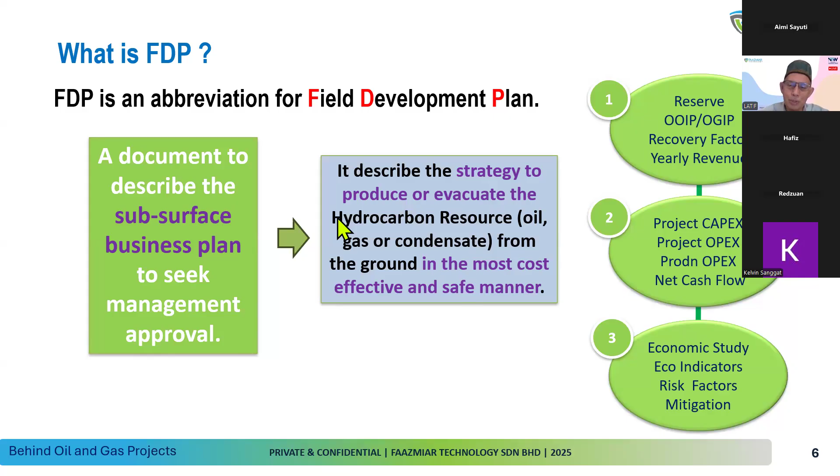So CAPEX means capital expenditure. OPEX means operating expenditure. There will also be another OPEX for production, and we're going to compute the net cash flow for the project and see whether it's positive or negative. At the same time, all this will be covered under the economic study and the economic indicators, the risk factors involved in the project, and the mitigation we should put in place to handle issues that come up within the field life of the project.

Okay, so for the field life cycle, you can see that we have five sections: acquisition, exploration, development, production, and abandonment. These phases cover the field life cycle. Normally we call it a conceptual FDP during acquisition and exploration. Then once we confirm it's a feasible project, we talk about the final FDP. We go to development, the production process, and the abandonment plan of the field before we leave the area.

So this whole cycle can go from 15 years to 50 years. Sometimes it goes beyond 50 years in some fields and areas. In terms of the PSC, normally a PSC will cover about 25 years. And of course we can ask for an extension of the FDP beyond the PSC to cover another 5 years or another 10 years based on government approval.

So first of all, acquisition of the area, like securing a block. There will be a bidding process. National oil companies like Petronas, the Thai authority, maybe the Vietnam oil company, or maybe an Indian oil company, and so on, will invite bids for blocks in their country.

And of course, a project is quite expensive, especially for deep water, HPHT areas or remote areas. Normally, we look for a partner so that we can share the risk of losing. So we distribute risk by having a partner rather than holding a 100% share. Normally, we split. This always happens in oil and gas because it's a high risk, high reward investment.

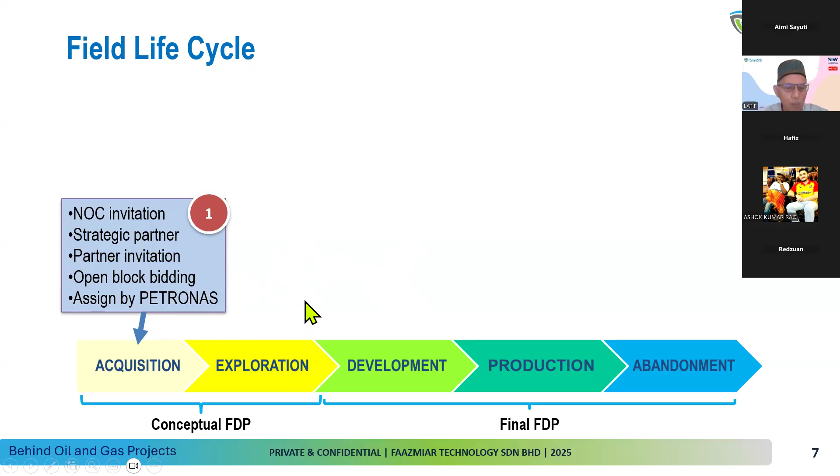For the second process, exploration, once you've acquired the block, you go for seismic acquisition, then you process the seismic. You have to decide on the trap or the hydrocarbon source from that information. Once you have some idea about the potential, you start to drill one exploration well, or wildcat well. This well goes through all the expectations, because before it was only mapping through seismic, but now you're punching through the formation, getting to the properties, getting to the fluid, whether it's oil, water, or gas.

You go as deep as possible. Normally, the exploration well goes to the basement of the area. Basement means that after that you're going to be hitting very hard formation, and it's difficult to drill.

This is the exploration well. Once you drill it, there's still uncertainty about the extension of the reservoir or field. So you might drill an appraisal well to confirm the extension of the field. At the same time you get more information from your logs, your core, and other drilling information — how fast you can drill, what issues you'll have drilling this well. All this is covered under the appraisal well.

In the appraisal well, you have logging and coring. You do production testing to know the potential of each reservoir. Then you establish the project economics before deciding whether to proceed with the development project.

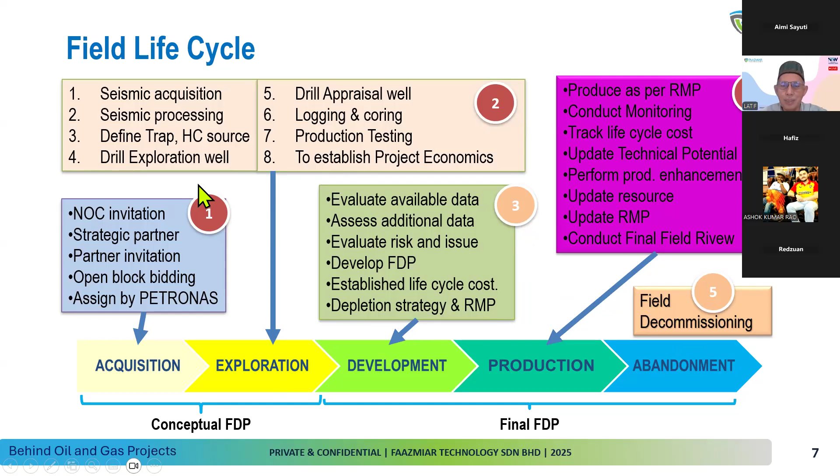So the next one is the FDP process. Quickly going through it: same thing, opportunity and acquisition, then we justify it through the FDP study, and at the same time we do the economics. If it's okay, we talk about going straight to initiate the FDP and continue. If it's not economic, normally it's not just given up right away.

So we have to go with another situation of understanding what can we do to make it economics. This is where we go and explore the technology available, and then of course we're going to assess the technology and go back to the study. And the study shows that if you improve your economics, then you go and proceed with your FDP.

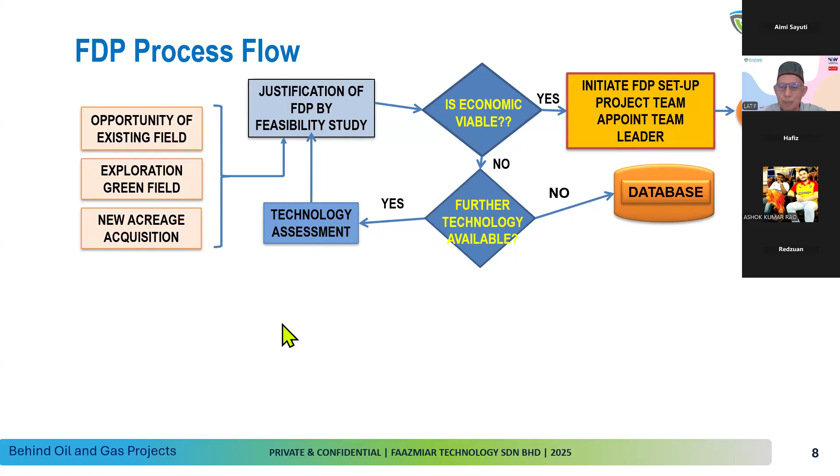So in terms of technology, there's a lot of thinking about how we should develop the field, with a different style, like a marginal field has a different technique to make it economic. If it's a big field, it'll be a challenge to reduce all the uncertainty of the reservoir. So when you've done that, and want to initiate the FDP setup, you're going to prepare a reservoir model, and then select the best option to develop the field, going back to what we discussed before in terms of technology.

Once you're done, you look at all these options. If it's economic, then it's acceptable, and you start to prepare for implementation of the project, get the budget, get whatever preparation the team needs for planning. And of course there's going to be a review of the final field development plan project. So that's more or less the cycle of the FDP process.

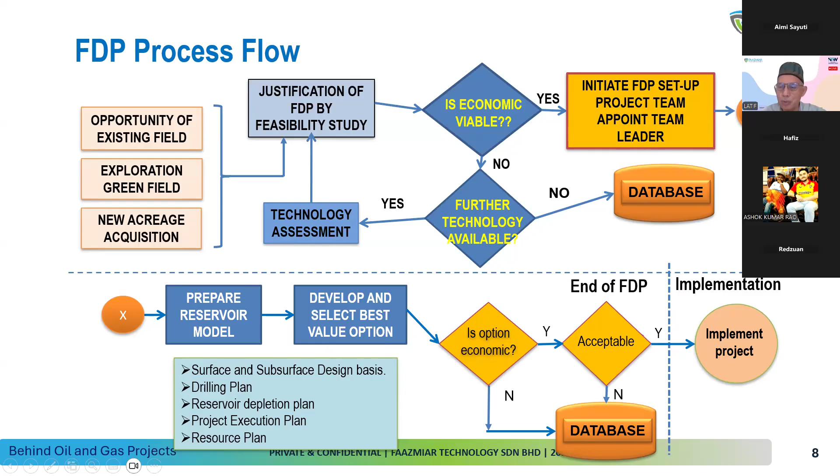Now, in terms of the people needed, FDP covers very few sectors, from exploration, to development, and then of course FDP and PNA and so on. So FDP is developed through multiple disciplines.

You can see that we have about five. But the team here should be doing the job to gather information, do the static modeling, dynamic modeling, and then select the development option and do the front end engineering to build the facilities, the platform, the pipeline, and so on. At this stage you sometimes have a subsurface manager who will more or less manage the project for these phases, and this is a transition. The project manager will also cover all the field development plus the construction of the facilities.

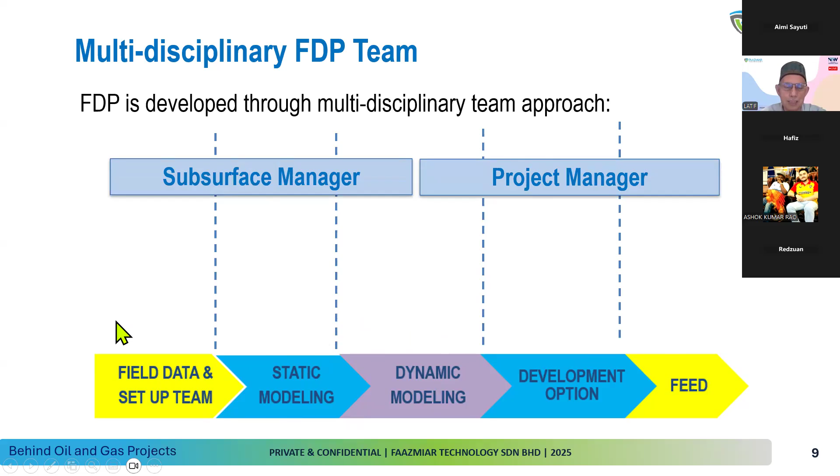So now we can see that for the people involved, normally the first phase involves geophysicists and geologists. Geophysics is going to be the seismic, geology is going to be the static modeling. And then petrophysics, we have to improve, because we have some data on the rocks. Petrophysics will evaluate the rock properties, at the same time the geomechanics, which will help us build up a good picture of how the field looks like.

And then production technology gets involved with the engineer. And then it comes to development, where we have facilities engineers and economists working together to really make sure that we complete the project successfully and it's ready for production.

Then for geophysical, this is the first start of the geophysical project. For the process itself, it's more or less the same as we discussed before: data availability, then we do the seismic well tie-in, interpret the seismic and mapping, and then do velocity modeling. Most of the mapping here is time based, so millisecond versus millisecond. But when we talk about converting those milliseconds to meters or feet, then we can see the thickness of the reservoir and how deep each reservoir is. So the conversion is important here.

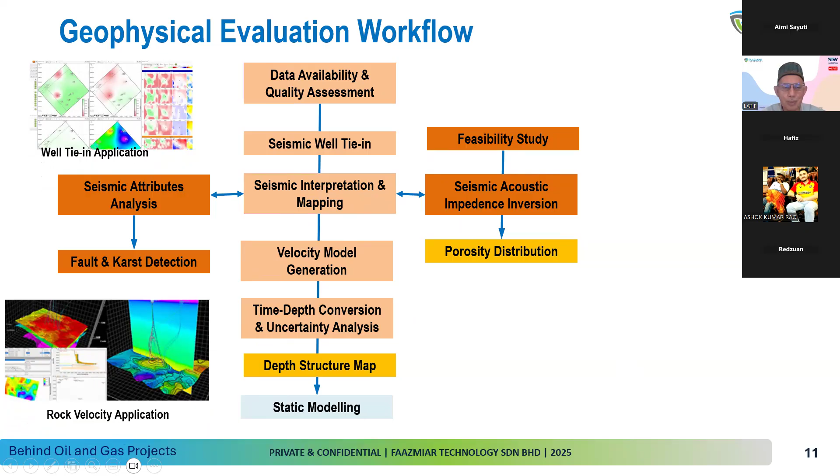So you can see all this, what we call the seismic data, how they compute and correlate from seismic and the well that's been drilled, the exploration well, with geomodeling software being used. And of course, all this calculation during the process of geophysics is going to be critical.

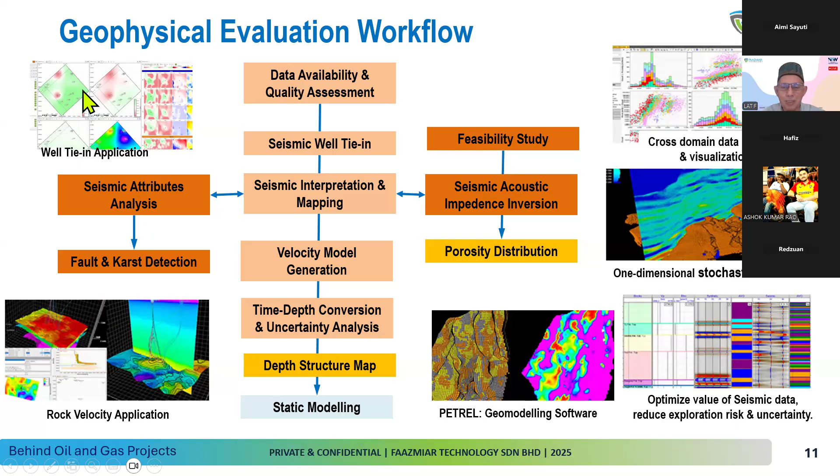Before, they couldn't imagine the extension of the reserve. But with seismic interpretation processing combined with the wells, they can more or less understand how big the reservoir will be.

Once they do that, they have a cross section of about 800 meters. This is the cross section, we can see the plan view, and this is one well - the exploration well - and this is the development well. So this helps them really understand the total field as a whole.

This is the seismic two-way time depth conversion, where from all these offset wells and the wells they've drilled, they can identify the conversion from two-way time in milliseconds to the TVD of the reservoir.

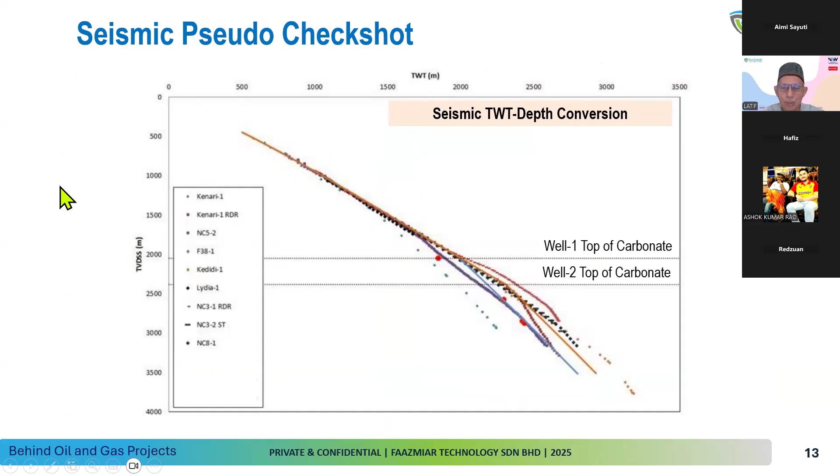So when they do the planning, they can see the depth and use depth rather than timing in the well tie. So this is the depth in meters, and this is the well drilled, which they correlate with the seismic.

So the well tie-in with seismic helps give an indication on how to interpret each layer. For example, the well we drill gives us the true result of formation types, porosity, permeability, hardness, and other elements - whether the rock is going to be solid, fragile, consolidated, or unconsolidated, and so on.

So they tie this into the seismic, and from that information, normally AI will be used to analyze how to correlate certain portions of the seismic with this tie-in. This improves the quality of the seismic interpretation by having the well tie-in.

If you only have one exploration well, the accuracy is going to be within a certain range. But once you have a second well, you have a quality check, and you get better results interpreting the seismic, because seismic gives you an overall field understanding. A well only covers a small area, but seismic helps you understand the total field coverage in terms of potential traps and any remaining hydrocarbon.

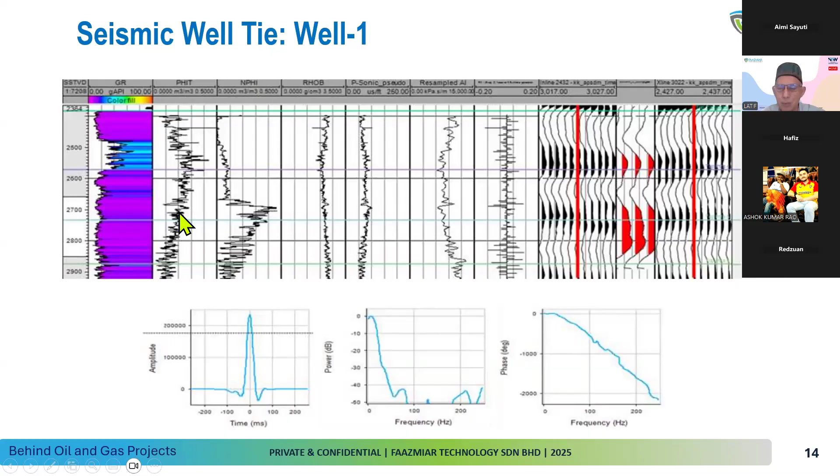For seismic interpretation, they start to identify the potential reservoir on each layer. Because our geophysicists have the expertise, when they tie in with the well, to see what layers they can identify from the exploration well versus the appraisal well. They can predict and put a virtual well at any point to interpret the intervals of reservoir on each one.

That's the beauty of having a well tie-in between seismic and the wells that they drill.

Once we have that - this is from west to east, and this is north to south, showing different cross sections - you can see it's like a cone or a dome shape, where each side is about the same size. Once you have that interpretation, you use it for your static modeling, and you can start to see all that in depth at the top of the carbonate or the layer and so on.

So this is how we interpret from the seismic to identify the top of the reservoir, and then how many reservoirs we have for that particular field.

Velocity modeling is another area where they use velocity to go through the potential reservoir and the potential thickness of the reservoir as well, because once you have the velocity, you have depth in meters rather than milliseconds or time. This helps identify the total gross bulk volume of the reservoir.

So the gross bulk volume means the total volume without considering what the clay content or the water content is going to be, just a volume. But of course, you're going to have to find another way to see where the level of water is, the height of the water, the oil, and of course the gas, if any.

So this is an example of how the seismic shows you in terms of the contour map. It's going to be like a contour map. So this is the top of the hill, and this is the end of the hill, so it's like a dome. You can see they have the exploration well, the appraisal well. So this is the same position as before.

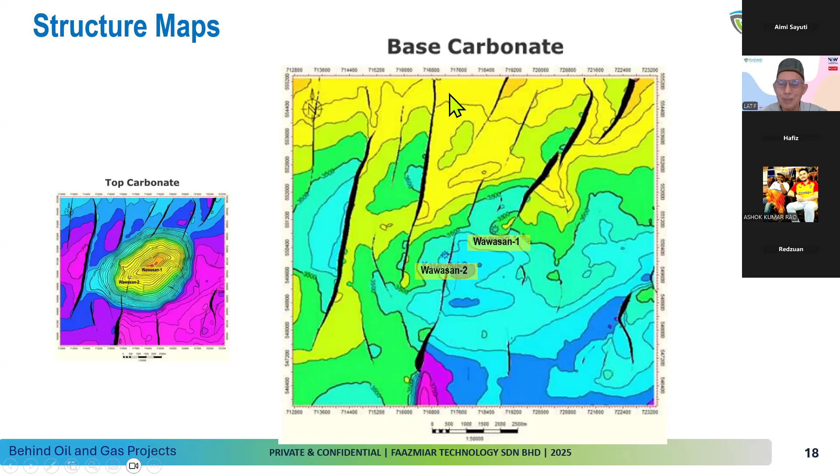So when you go to the base carbonate, the base of the carbonate is how it looks like. Normally for us it's quite difficult to understand these features, but our geophysicists and geologists are aware of this potential fault within the field, because some fault is isolating the hydrocarbon from one side to another, and some fault is not sealing, so you can see the hydrocarbon communicating from one side to another. So it's all been studied whether this fault is sealing or not.

So in terms of petrophysics, they're going to study the core as well as the logs and try to see the distribution of porosity percentage. They start to learn about the rock properties and the core depth. So with the core that they have, they extrapolate the core studies on each one, the porosity. So you can see the distribution is random.

That's why it's quite difficult to find an average of a certain porosity. So this is where we talk about whether it's a normal average, a weighted average, or a different type of average to consider all these differences. It's going to be quite difficult. That is where we call it uncertainty. Porosity can be very low and can be very high.

At the same time, we're also going to evaluate the formation pressure. Formation pressure gives us the strength of the reservoir to produce hydrocarbon naturally. For example, sometimes you have a good, strong water drive, so the oil can be produced for some time, about 10 years, with natural drive. Sometimes you have a gas drive, a gas cap that can push the oil up for at least the last 5 years without needing additional water injector or gas injector. So the pressure profile is important.

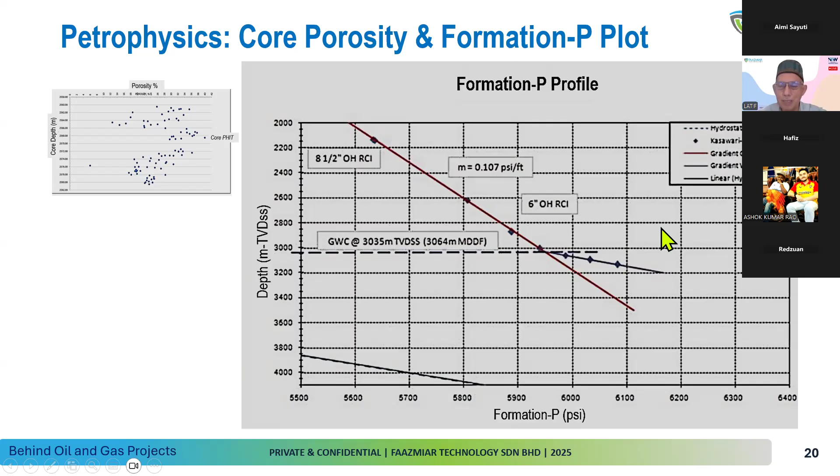Another important thing about the pressure profile is identifying the gas-water contact. In this case it's gas. So what happened here is this is the hydrocarbon, this is mostly what we call the hydrostatic of water, and then you see a deviation. The deviation is steep enough to show that it's in the gas zone. This is how they use this formation profile to identify whether it's gas or oil, by the gradient.

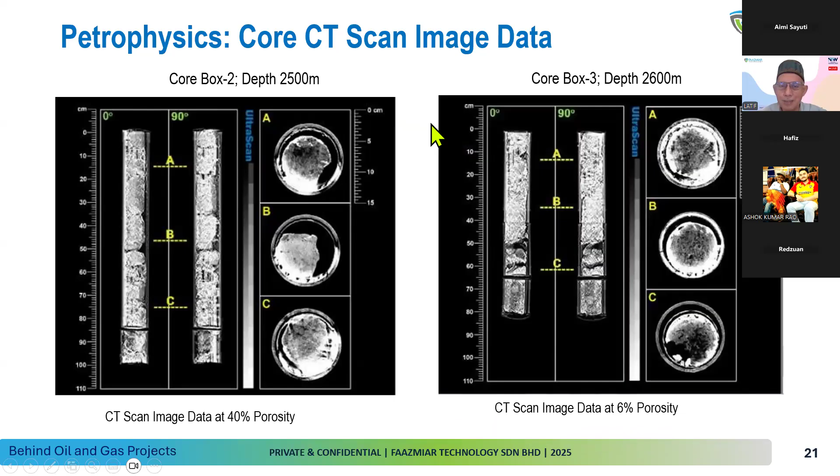So module number 2, we go for the geological study. You can see that we are on the second stage here, talking about moving from the field data into static modeling. So it's about here, more or less.

For the static modeling evaluation, we need to have data coming from the core, the DST, and from the logs, from the logging - this is what we call the time test, more or less. Then we're going to decide the project name or the references, because references are important - whenever you use a map, you must use a total coordinate. So when you shift from one area to another, or one period to another, one analysis to another, we must use the same geodetic datum. So that's the importance of having good references maintained properly.

So we import data, offset well data, even from nearby fields. Sometimes you'll be able to get some data from the nearby field to get more correlation in your study.

Structure modeling will be done by Petrel, more or less. Facies model is normally done by our geophysicists. Properties model also uses porosity and permeability data and so on. So net to gross and the NTG module that we talked about will be assigned for this particular study, and it will also cover water saturation. Of course, this is the criteria they use in the evaluation.

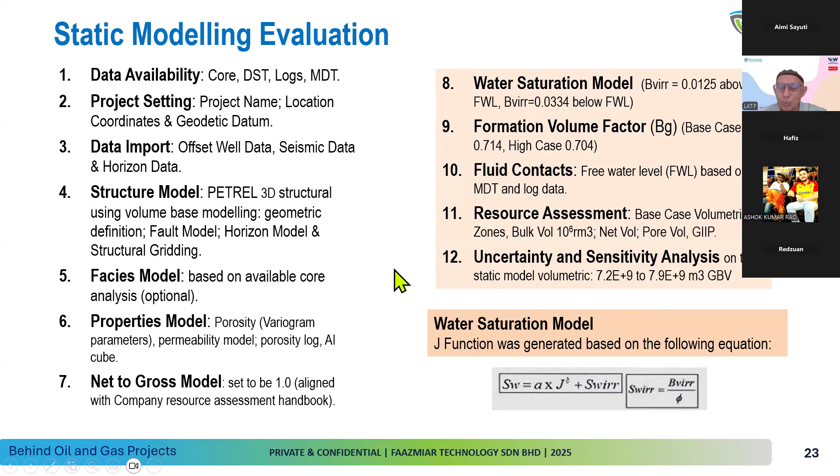For the water saturation model, normally this is the popular J function used by oil and gas. Of course, new suggestions always use a different factor, but this is the common function for water saturation. Water saturation means you can identify what is going to be present - for example, if water saturation is 60%, then 40% is going to be either gas or oil. So that's more or less the understanding about water saturation - it tells you what the volume of oil and gas in the reservoir will be.

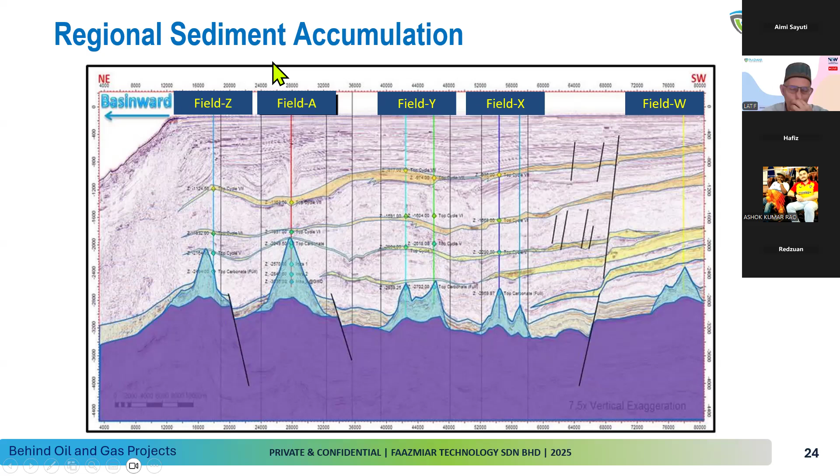So this is one of the more popular features of Sarawak.

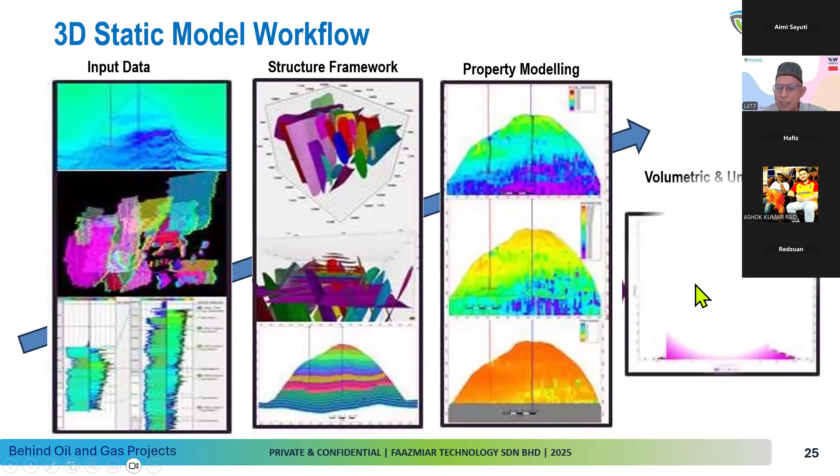Okay. And then finally, of course, we're talking about the volume, which is the important factor, because when we explore oil and gas, volume is a very important feature that we have to decide, because it will decide on the revenue of the project, how much oil or gas we are going to recover, and of course, how long it can last. So it becomes the economics of the project.

Okay. So once we have all this done by the geophysicists, the geologists will start to come in and try to understand the field itself, with all the samples. We talk about the petroleum geology that will go through all the expectations and the origin of the oil, the depositional environment, and so on. The depositional system, we call it. And then geologists will do another mapping that will involve more of the property, the volume, and so on. And of course, they try to correlate information to have the better result.

Okay, so when we talk about all this study here, generally, the construction of stratigraphy will help everyone to understand how the field will look and what is going to be the potential of remaining hydrocarbon within the area. And of course, they want to really describe their stratigraphy so that when they explain the volume or the potential reserve of the area, they can explain much more conveniently, much more confidently.

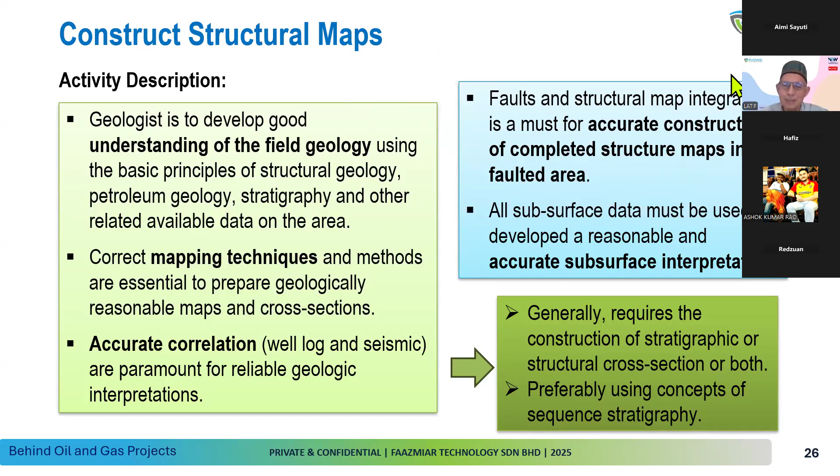So of course, geologists try to identify all the potential faults based on the seismic. And then from these faults, they try to see whether one reservoir will be isolated from another, or still connected if it is a non-sealing fault. So all this volume will be based on faults, because failure to identify faults gives you a false understanding about the volume, the GRV, as we call the volume itself.

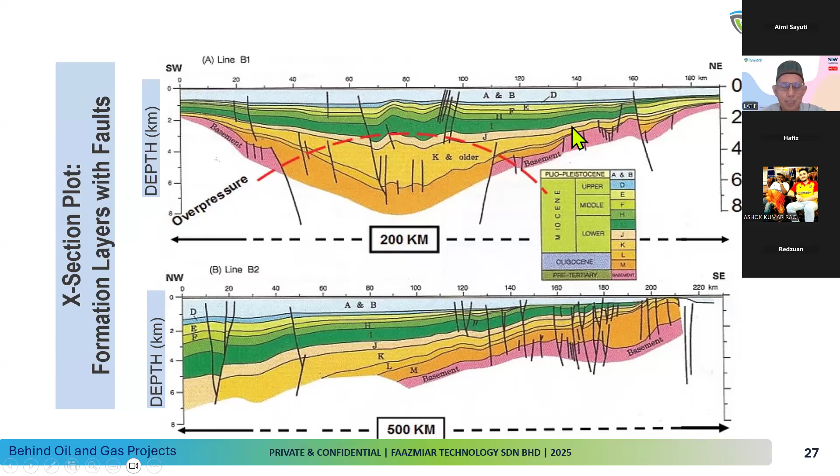Okay, so the same thing happens on another side, southwest to northeast, which is just a cross section of the review. So once you combine the 2D and 2D, it becomes more or less 3D in terms of the features. You can see how the formation is gradually going up, and the potential fault may be revealed on another side of the cross section. Okay. So that's about the geological part.

So now we go to reservoir engineering. For reservoir engineering, you can see that we're going to go more or less into dynamic modeling. So just the basic understanding about static modeling and dynamic modeling. Static means that it is in the original condition, nothing moves. For example, all the accumulation happened hundreds of millions of years ago. So there's not much movement. So the static condition is studied in that model. We're talking about the original condition.

But when we talk about dynamic modeling, it's about what happens if we start to extract oil: what will happen to the oil movement? What will happen to the pressure declining? Or what happens to the movement of water or gas within the reservoir? So that's why dynamic modeling is covered in much more detail and is a true computation of the potential of the reserve.

Some static models have shown a good volume, but when you go to dynamic evaluation, dynamic simulation, you see that they have issues with permeability, issues with the sealing, the fault itself, and so on. So you have to really understand this, what we call dynamic modeling.

For reservoir work, in general, they're going to go for pressure analysis, temperature analysis. Of course, this will help to decide on the dynamic situation of the field when you start to produce. The fluid properties, of course, you decide oil, gas, or water, and the influence of contamination, if there is any CO2 or H2S in the oil or gas.

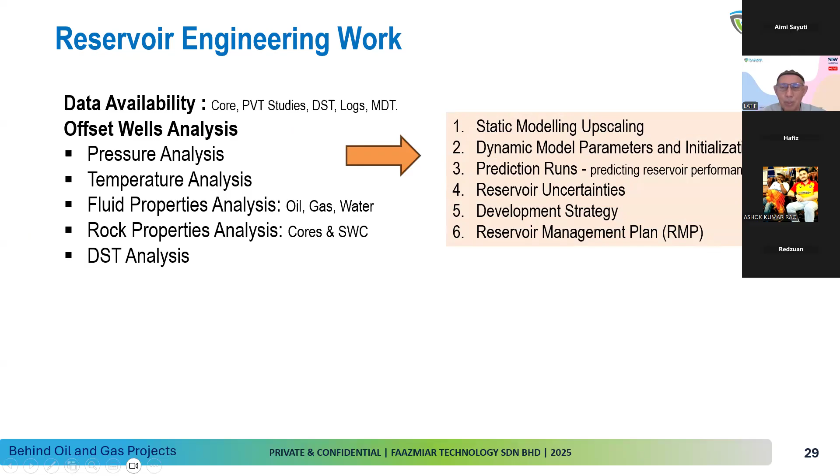So all this information will be going through for static modeling. Upscaling means that the reservoir engineer will revise the static modeling, putting it in a much bigger scale, and then of course it's going to go for a much faster simulation process. Dynamic model, and then of course they have to go through all the uncertainties when they evaluate through the reservoir dynamic modeling. At the same time, you're going to see all this reservoir management plan coming in.

But this requirement is because we want to do repeatedly multiple simulation processes. For example, one process before took about 1 week sometimes, and it went down to 1 day. But currently, we can make one cycle within 5 to 10 minutes because of the computing power that is currently available. So the processing now becomes better, so it helps a lot.

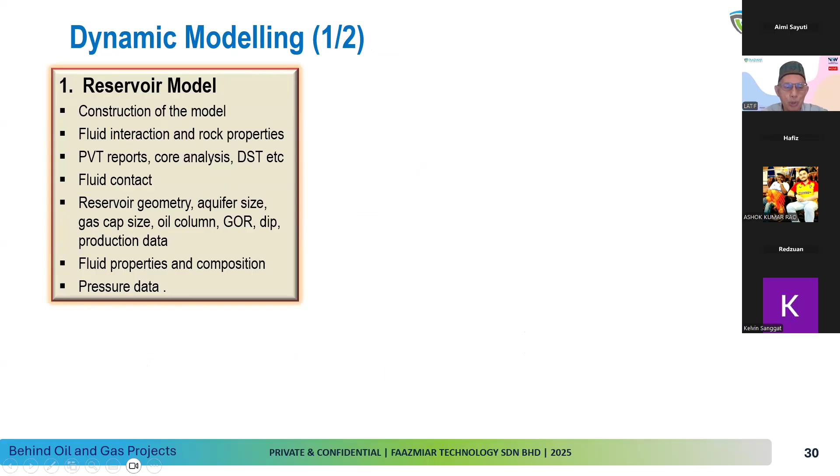Now, just briefly on the understanding of the modeling. You can see for the reservoir model, they need a PVT report, which is coming from the lab. Reservoir, then they start to really compute because it's going to be dynamic. What happens if we start to produce 1 year, 5 years, 10 years, 50 years? The depletion will come in. We want to see the depletion, and see how many platforms we need to put in the drainage.

So depletion will be much more if more wells are drilled, and less if fewer wells are drilled over a period of time. At the same time, depletion can be controlled by whether you drill a horizontal well, multilateral well, vertical well or slanted well. So EOR, enhanced oil recovery, is also part of the plan. If you see all the scenarios here, whether you need enhanced oil recovery to help you improve the recovery factor of the field.

Now we're talking about the well construction itself. Once we know all this, then we know how many wells to be drilled and how we have to complete the well. Normally, if you go to smart completion, then of course you optimize the production, but you have to spend more money on the smart completion or intelligent completion. So a cost benefit analysis has to be done on that.

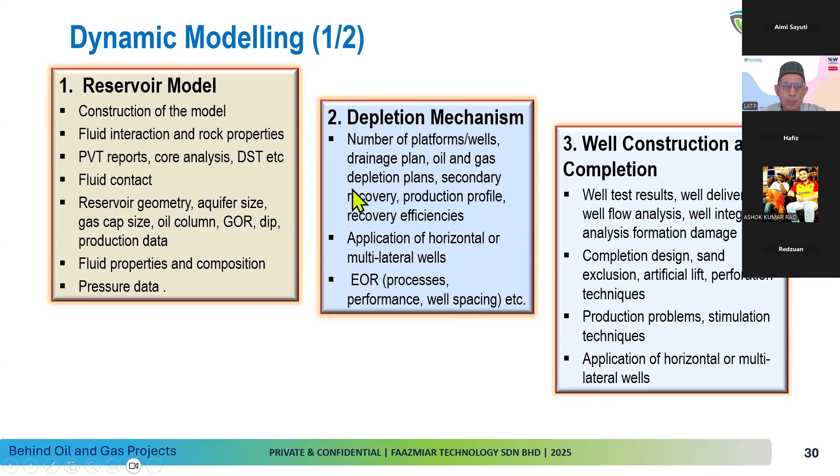Okay, now we go to the next one, which is reservoir management.

For example, we have a space out for the sidewall core. The gun will explode, and then there'll be a core going through the formation, and it'll be pulled back with the wireline and pulled out to surface. So the sidewall core will be used for analysis of the rock.

Because if you're talking about running a separate drilling assembly with the core barrel, and then you're going to core, it's going to be very expensive and very risky. And sometimes you get stuck and so on. So that's why the sidewall core is an option, but the quality is not as good as the real core. So anyhow, you have to bear with those difficulties. Okay, sidewall core. So proceed. Anything more? Any more questions?

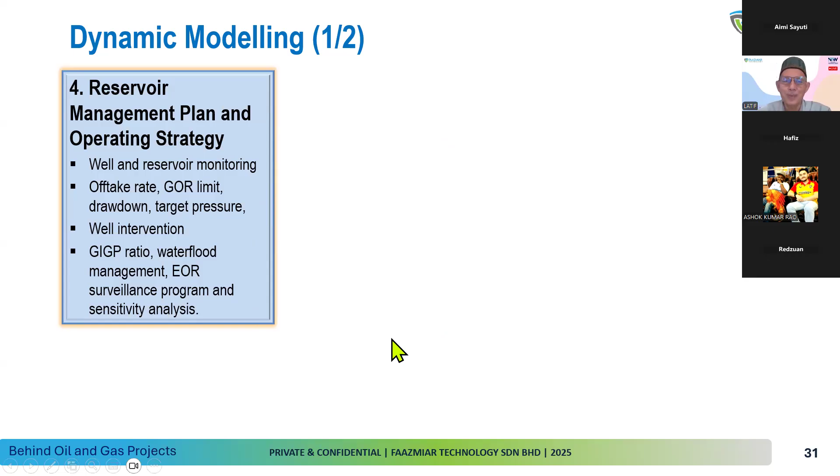No. Okay. Now for uncertainty, this is another area where we need experience. We need understanding about the regional area. So when we talk about uncertainty, this is where you're going to understand what is going to be our issue here. For example, you expect the reservoir quality in terms of porosity to have a big range, and then your permeability might be another range. And in terms of the fault, sealing or not sealing, all this uncertainty must be considered to be able to conclude your reserve potential.

Of course, this is a reservoir surveillance plan, or we call it reservoir management, RMP, the same concept. So this is the plan that we start to use from day one, because we recover information about the behavior of the wells, and then from the production of each point of the reservoir, we can see which one is producing as per our simulation, which one is not. Then we try to understand the reason behind each variation, and you make all your potential mitigation plans.

So of course, the last one will always be recovery factor, because some field is a very big field, but because of the position of your wells, because of the extension of the reservoir, you cannot drill too many wells, because of course many wells means that you can recover more. For example, for that field, you need to drill 6 wells to be able to get 50% gas. But if you drill 3 wells, you're going to have about 20% recovery factor. So it depends on the number of wells.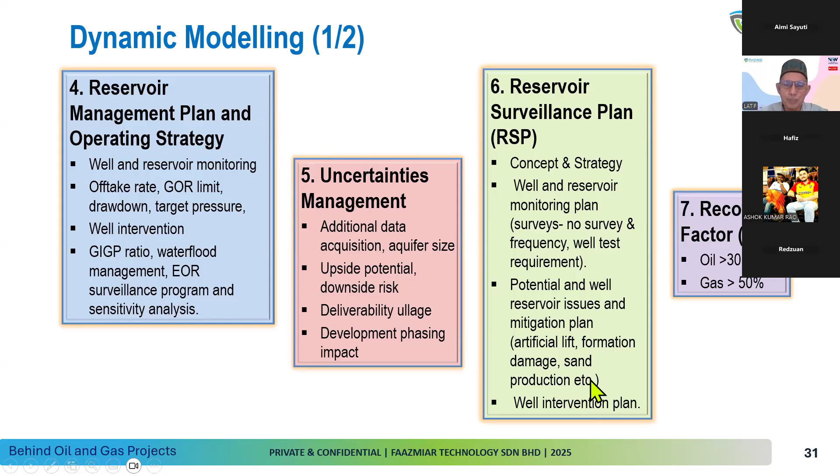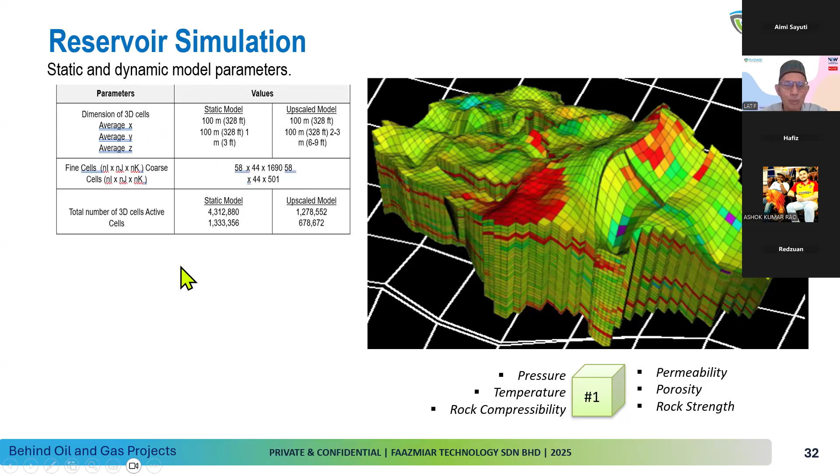Okay, so at the same time, according to this static modeling here, you can see all the numbering that we discussed before. We have the number of cubes and so on. Okay, so all the parameters are shown here. This is typical data that you can see from this dynamic modeling, that we use for computation.

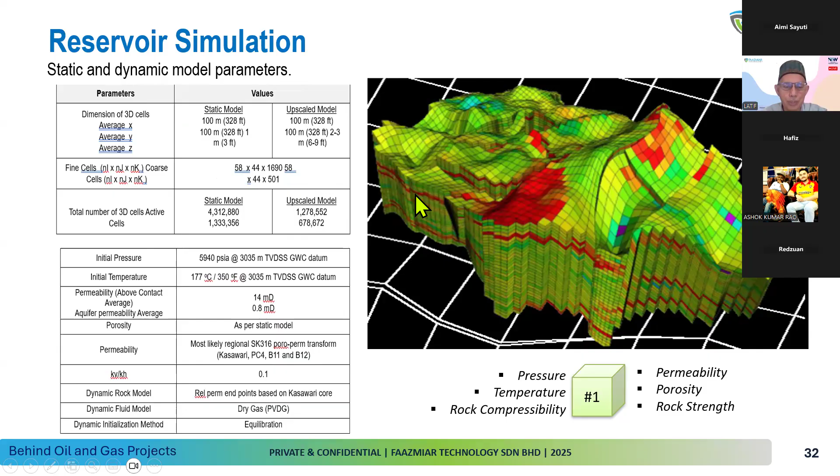So comparison is quite important, and this is a quite unique area. I think what happened is when I go through a situation of comparison, static modeling versus dynamic modeling, you can see that in most cases, if there are good references in the field—for example, this field has very good surrounding references—you have offset fields that give you some help.

Normally you can see a difference of up to 4-5%, or even close to 10%. But because this area is very close to a nearby field, they have more information, more data, and with the good reservoir simulation we have now, these numbers become very close to one another. This shows the accuracy of the prediction, which is good for us to do our economic study and dynamic analysis based on the volume.

Okay, but there's no recovery factor yet here—it's only the volume, no recovery factor.

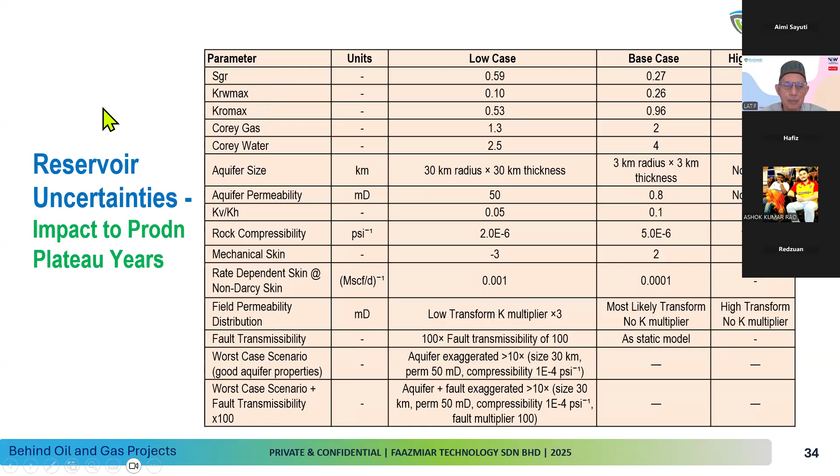And of course the same thing happens, like you go for what is negative impact, positive impact. So all uncertainty is normally mapped out with all the parameters here. This is normally presented in this particular case—you have all the sensitivity that happens here.

So what if it's going down? This is the plateau years—for example, the plateau years here is about 15 years. What if the permeability is less by 6%? You can see the plateau reduces by 10%. If the permeability is more by 4%, you can see it goes almost 7-8% more on the plateau days—so the extension of the plateau days for production is more.

So that's more or less the understanding about the impact of uncertainty—high impact, moderate impact, and low impact—based on the chart or variance you see here. Some is very marginal, but the big impact comes from permeability and fault, as well as permeability and skin, or the damage.

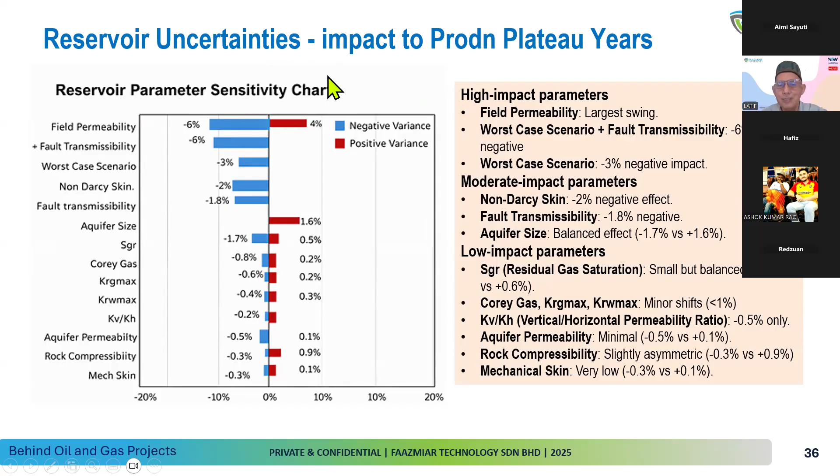At the same time, we're talking about how we decide the number of wells. Normally you define the field geology or target, and the capex, opex, or budget—because the more wells, the more you're going to spend. Then with this reservoir data, you decide the best well location, your target location, and how much you're going to recover from each spot.

For example, you have 9 trillion cubic feet of gas, but if you space about six wells, you have to recover about 50%. If you put 10, you have to recover about 70%. So it's all a discussion about the economics of doing that, because the well is expensive.

One well could range about 30-40 million, and if you drill 10 wells, it could be 400 million. So the project is about 2 billion, meaning about 25-30% of the well cost contributes to the project cost. So it's very sensitive to decide the number of wells.

So it's the creaming curve analysis that's normally popular to decide the number of wells. And then we run simulation to see the spacing and the production profile of each field. Then the economic evaluation, and we finalize the development plan—that's the process for our wells.

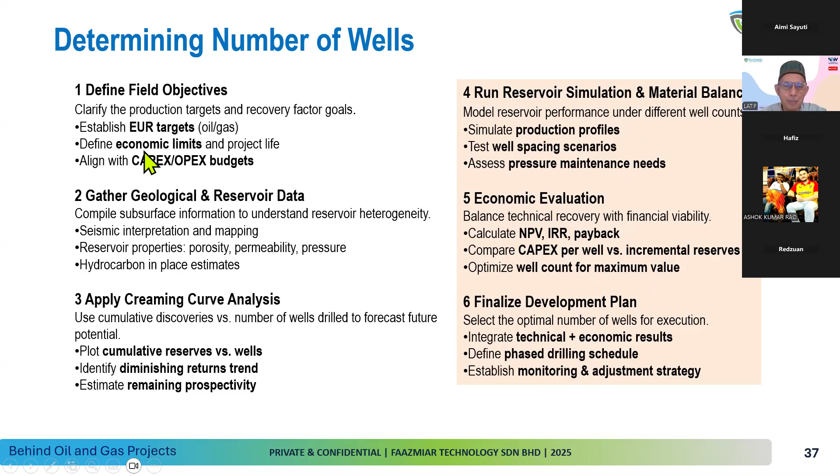So you must understand the difference between PSC life and field life. PSC life is when the production agreement is about 25 years. So we compute based on 25 years using simulation to see how much our recovery factor is. If the field is extended, for example the field life can go to 35 years. Based on the study simulation, that's about 66% you can recover at the end. But normally we concentrate on the PSC life because our economics will be based on the PSC life.

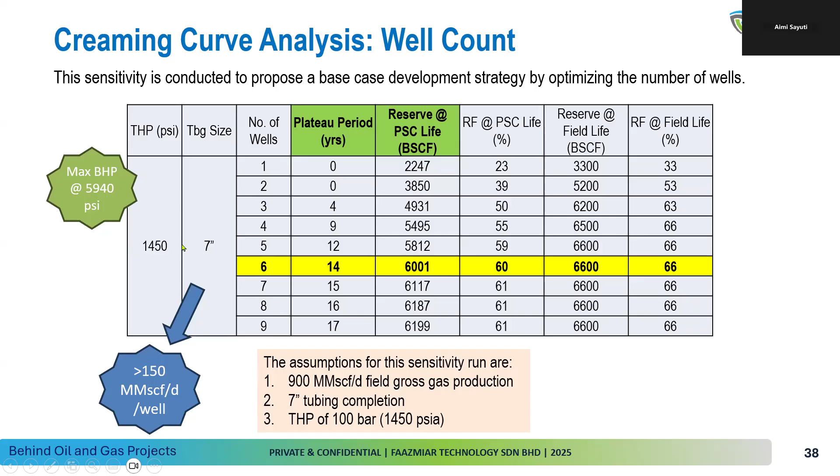Okay, so once you've done that, we're talking about the agreement based on the study here, talking about 6 wells, and then the compression requirement. It shall be further studied because, like I mentioned, if you know you need 1400 psi to be able to pump through your pipeline, if you want to lower down, then you have to think about some other mechanical process for pumping through, which costs money, capex. So you have to decide on the economics for having that compression.

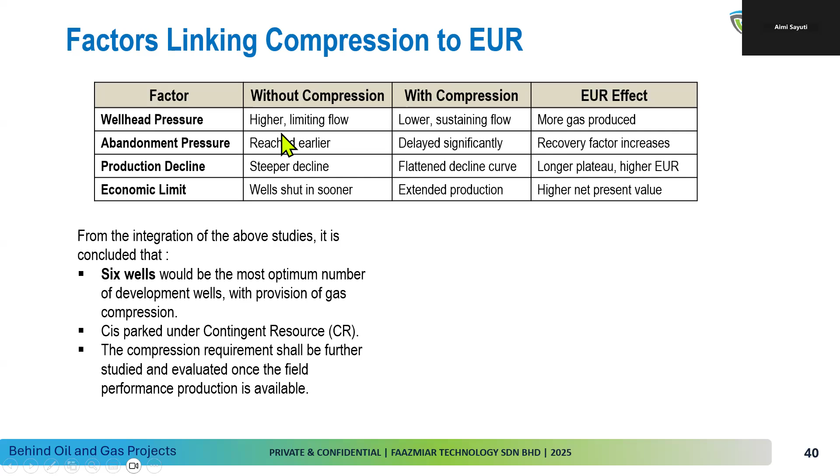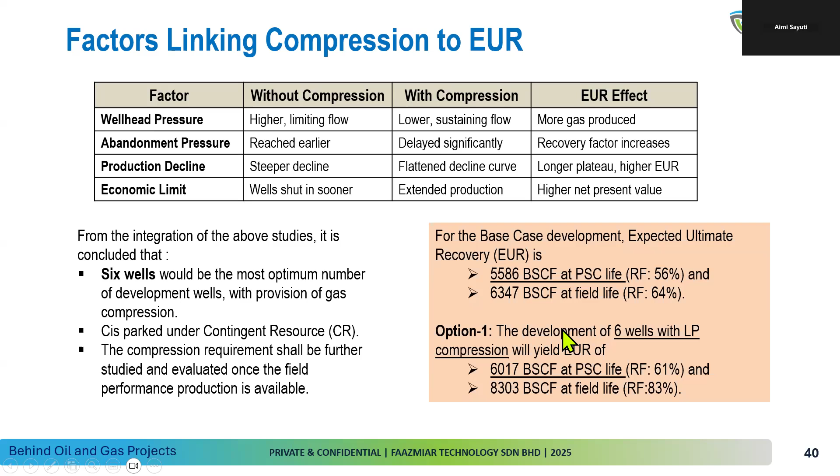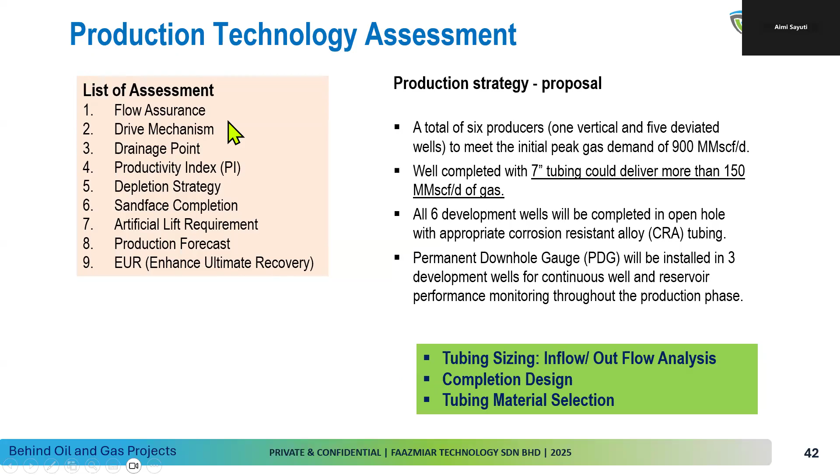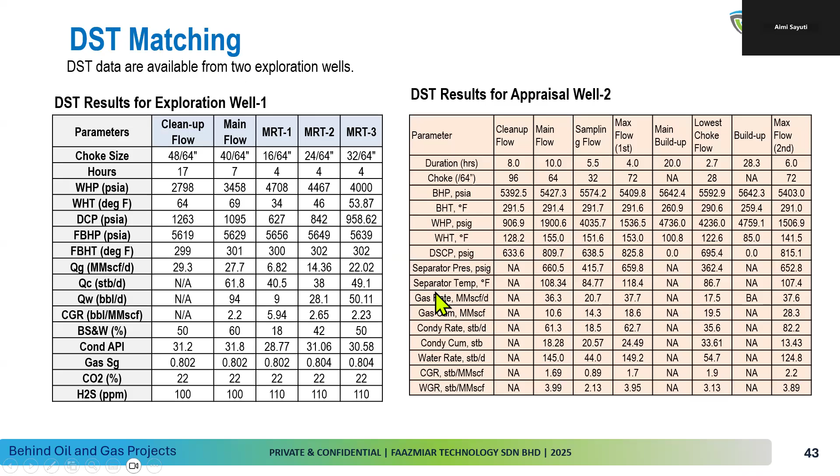Based on the real NC2 situation, as mentioned before, for PTEC we try to use all the DST results from the previous exploration and appraisal wells. With this operation result, they can actually plot what they call the inflow performance relationship for the well. So based on the DST, they can draw this graph, the inflow performance.

And then they put in the 7-inch resistance and so on, so they can see that this field can flow almost like 200 million scf to reach the optimum with the resistance from the rock and so on, the inflow from the DST result. So this is more or less the understanding that the capability of the 7-inch will have up to almost 200 million scf per day for this one well.

They also use this to calculate the erosional velocity. Then they can see that when you produce the well at a higher gas rate, your friction will be much more. Friction will cause damage to the tubing, so there is a limit.

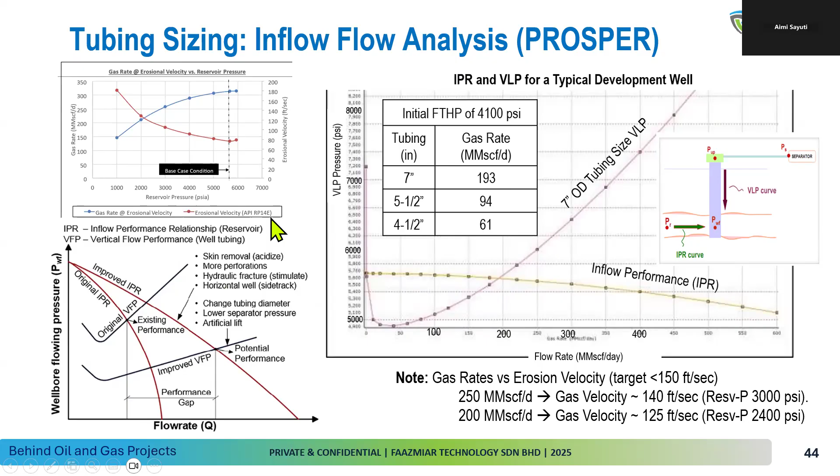Okay, tubing sizing is the same thing. They checked through a few sizes, and finally found out the 7-inch is going to be the best because it can meet the 900 million scf requirement. For 6 wells, we are able to produce that, so they meet the requirement.

Of course, once the well is depleted, the 900 million after 14 years will go to 800, then 700 after 25 years. It's going to be less, but still within the range of our economic analysis, even though the decline is expected.

Okay, so this is more or less the understanding about the tubing material. Of course, we have all the pressure, temperature, the amount of CO2, the partial pressure, and the H2S ppm as the partial pressure from the H2S. So the partial pressure is going to be used in our determination of the tubing material.

So this is what we call the selection table from Sumitomo. We're going to have, for example, starting from CO2 - if the partial pressure is less than 2.9, then you go for carbon steel. But the moment it goes more than 2.9 psi, for this field it is more, so they go to the next step.

So for temperature, if it's more than 1.45 psi, then the temperature is affecting the selection. If it's less than 1.5 psi partial pressure, this pressure and temperature will decide on the material. So this is how we read it - if less than 3 kilopascal, or certain psi, I can't remember exactly, we will convert later on. So for each temperature, we decide on the material.

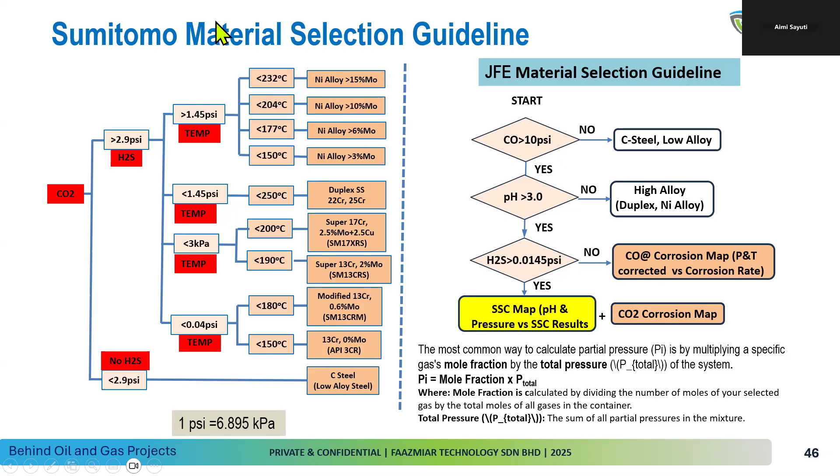Another way is actually talking about the flow process in a different style. So this was starting here, then we have carbon steel, and then we have corrosion - this is a map to be used. This is the map. And then this whole process of understanding the relationship between the CO2, the pH condition of the water, plus the H2S - all this process also helps to decide the material.

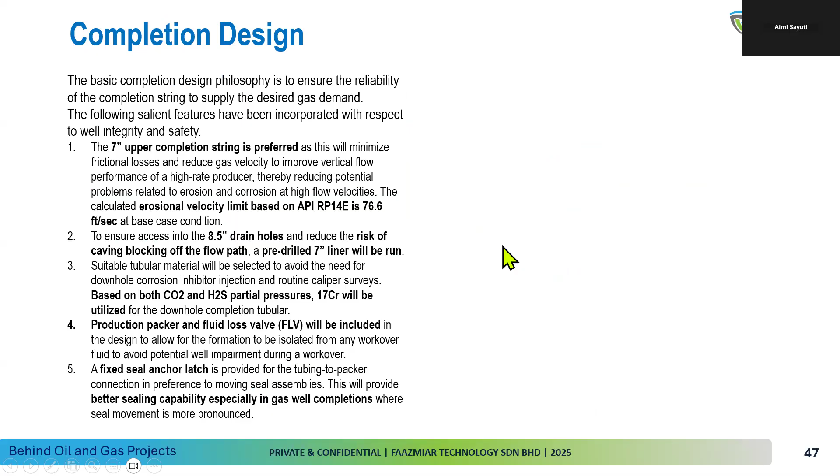Completion design - as you know, we're going to prepare a completion design for the well. So this is how we're going to go, for example, this well we drill up to 8.5 inch hole at the last section across the reservoir, and then we run the completion. So this is going to be an 8.5 inch hole, and this is the 7 inch pre-drilled liner, so it's open hole completion. You can see that this is the 7 inch casing, which is 17% chrome because of the chart shown here. And this is the connection, WM21.

So they have the 9 5/8 inch casing here, and then they have the 10 3/4, the 13 3/8, and 30 inch. This is the casing designed by drilling, and tubing is required by PTEC. So the way we design is we have the sizing, then we work upwards - 7 inch needs 9 5/8, then 9 5/8 can fit 10 3/4, and so on.

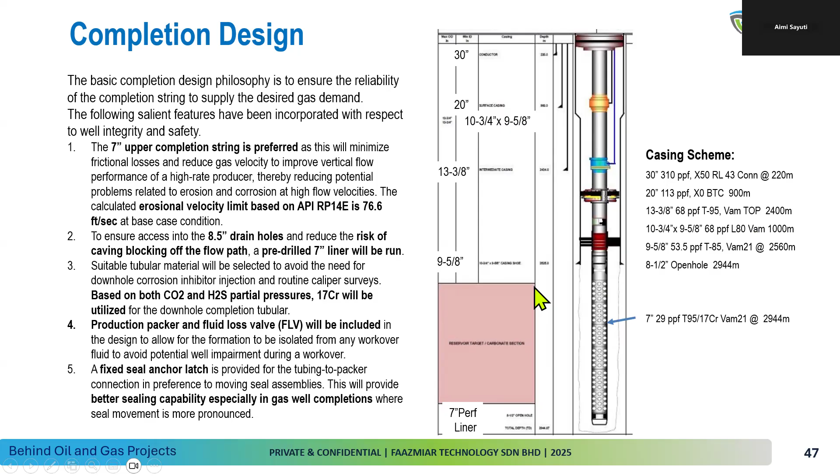So if, let's say for example, what you do actually is you're going to have a riser platform in between. The riser platform is a transit platform where all the hydrocarbon from each field - for example, from this field, you go to our CPP, you go to the riser platform, and then all other fields in the future also tie into the riser platform. So the riser platform is being prepared to accept maybe another 4 new fields in the future.

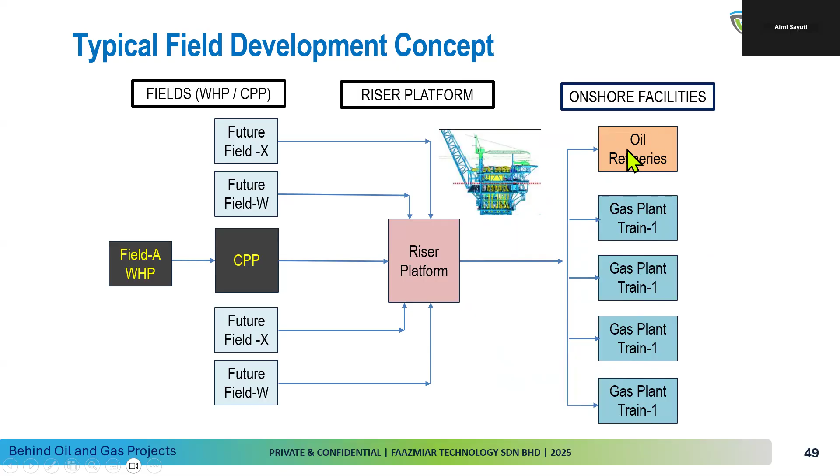And then, of course, from one riser platform, we have the onshore facilities. So all the piping, the oil pipeline, the gas pipeline, go into - this is going to Bintulu, or the gas plant, the train. And then, of course, if there's any refinery, like for example in Miri, then they will go through a separate pipeline to the oil refinery - Miri, Labuan, or KK, Kota Kinabalu.

Okay, then, of course, the development concept. For the development concept, you can see that we have the base case - for example, in this field. This one is not relevant to that field. For example, one field, they have, of course, one platform here - this is like the pipeline going through, this is the FSO, 700,000 barrel.

And then the tanker will come in and out to drain the content here, so you can have continuous production of 700,000 barrel. The tanker might be coming up and loading - each loading sometimes for 500,000 barrels, sometimes each package is about 400,000 barrels. So it depends on the size of the tanker to drain through the FSO, floating storage and offloading vessel. Okay, and then, of course, option one - sometimes you evaluate what option one is.

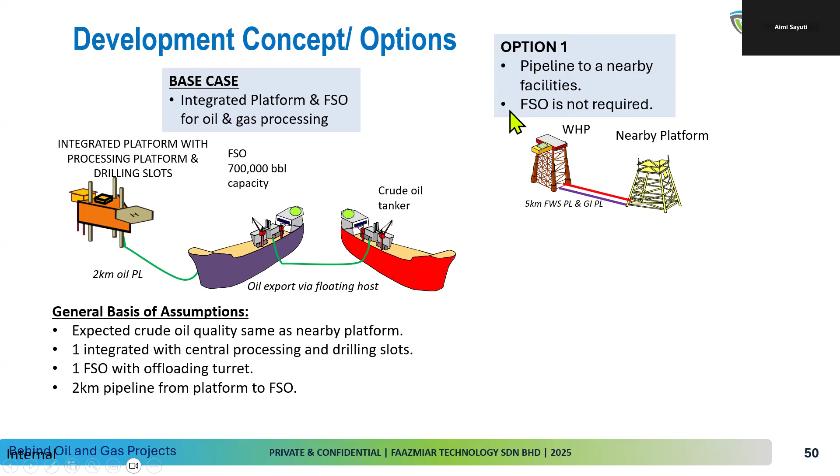Option one, rather than going through the FSO, we take a direct pipeline from this field to the nearby platform. So we tie in to the nearby platform, which could be a riser platform or another field's platform, then go to shore. We make use of the existing platform. For example, the platform was designed for 60,000 barrels, but after 6 years it drops down to 50,000 barrels, so there's about 10 or 15,000 barrels of capacity available. The question is whether that's enough for you to ride on, based on the design capacity of the platform and the pipeline size. So that's option one.

Option two, you try to have your processing on the floating storage. With a normal FSO, this is only for storing, and you have the processing elsewhere. But here we have a floating, processing, storage and offloading unit - an FPSO - which also processes. So you don't need a platform anymore, but you need subsea well completions. All the wells are subsea, tied in with umbilicals and pipelines, with control going to the floating platform, and we produce from there. This removes the requirement for a platform and makes the project much lower cost, but you have to spend more on the floating storage because it includes processing. The tanker comes in and out to offload the volume.

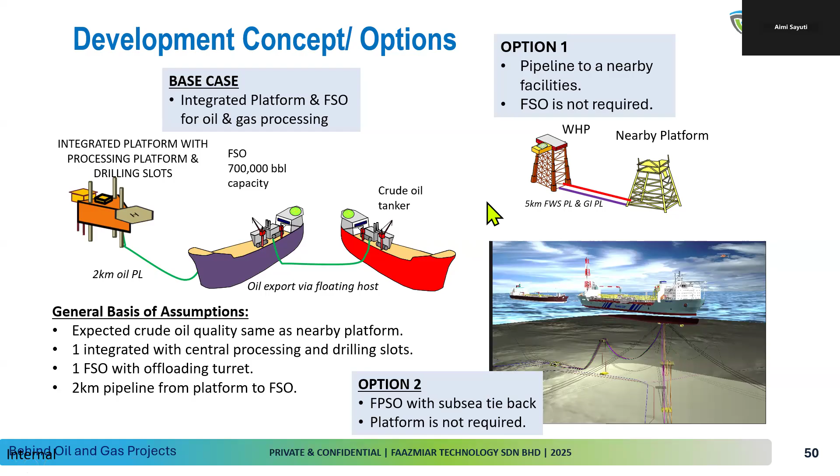This is the option I believe is being intended by one of the new players in Malaysia, trying to use an FPSO for their marginal field to really reduce cost. It's interesting to see how much it will cost, or what the economic analysis shows, and whether what they thought would happen actually becomes reality.

For field development plan, you can see this concept in general - you have the processing platform, then all your wellhead platforms for drilling, then all the pipeline links. You can see this particular wellhead, and then you have your tanker linked over here, so you don't have to have a pipeline to shore.

So what's the decision for pipeline? If it's very far, for example 200 kilometers from the platform to shore, the cost of the pipeline becomes very expensive, so it's always cheaper to have floating storage rather than a pipeline. But if it's close to shore, the cost of the pipeline is much lower, so it's always better to have a pipeline to shore instead of using an FSO. It's always based on economics - whether you're far from shore or close to shore - and a cost-benefit study will be done on that.

The sizing of the pipeline going to shore, to the loading point, depends on the size needed. You can see all the pipelines coming in - oil pipeline, gas pipeline, and water injection pipeline. This platform has 6 oil producers and 2 water injectors, and this one has 8 oil producers and 4 water injectors. You can see the drill platform will have a few wells for oil production and water injection, sometimes drilled together.

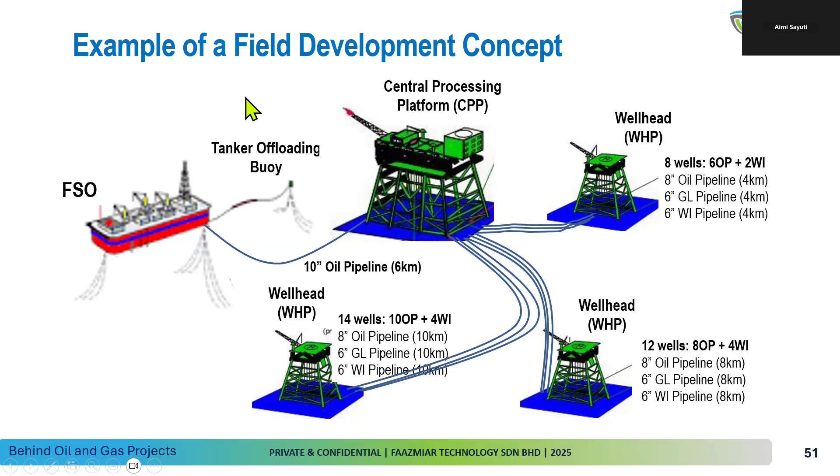So everything costs some additional capex or opex. That's why, to decide on water injection, we go through simulation and then economics analysis to decide which way to go.

So from this example, we have about 24 oil producers, each at about 3,000 barrels per day, giving about 72,000 barrels a day for production. If the holding period is 15 days before offloading to the tanker, at that production rate the FSO must be designed for 1 million barrel capacity.

So this is how it depends on how comfortable they are with the tanker coming in place, because there will be a special marketing department that will decide on the selling of the oil to various customers or clients. So they will arrange so that every 5 days there will be a tanker coming in, so they will always be draining the capacity so that the platform can continuously flow, non-stop, the full capacity of 70,000 barrels a day from this platform to the FSO for storage, and then be exported to each tanker

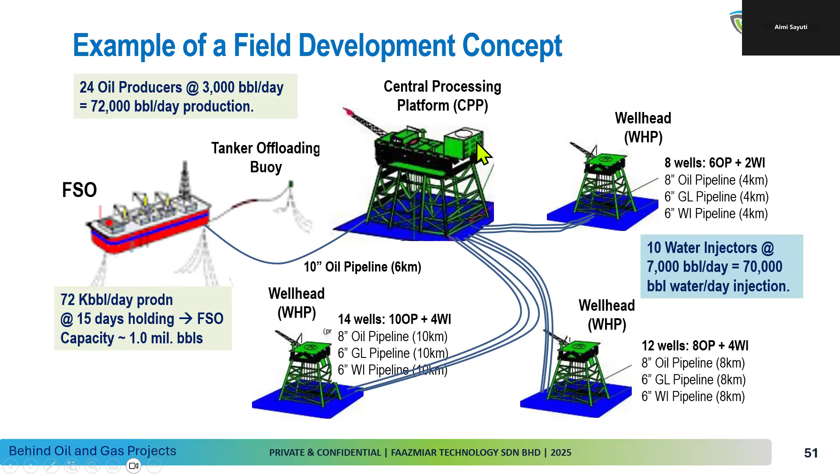So this is, for example, a field in Sabah Sarawak. So this is our field, for example. Then this field is very close to the nearby field. So of course we have to decide whether we tie into this platform, or we go straight away with our dedicated line to shore. So it depends on the economic analysis. In this case, I think the study showed that we have to have our own. This is a gas field. So for a gas field, it's going to be a dedicated pipeline because of the huge quantity, because no other field here can accommodate such a huge amount of

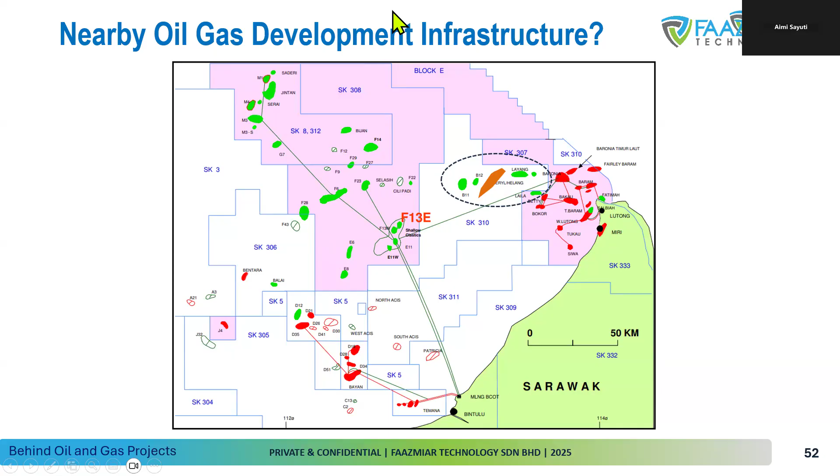gas, for example. Okay. So of course, when we talk about drilling multiple wells in one platform, some platforms have 14, but in this case you have almost 20 wells, 30 wells. This is my project with Talisman. We have Bunga Kekwa A, we have B, so this I think is A. Our design for Talisman is what we call a monobore plan. So the monobore plan is that we try to target one target with one well. So that's why we have more, but it can give you much better recovery. At the same time, it can drain to the maximum production per day from this platform. These are typical slots for each well, and each well goes in a different direction, meeting their target.

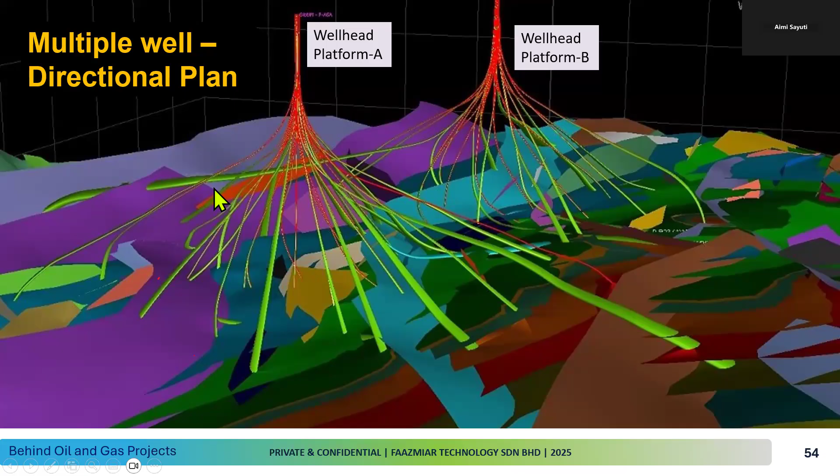Okay. And in terms of 3D, this is the Talisman project, where one platform has about 25, 30 wells. You can see that some wells have been drilled to certain locations. And then afterward, we come in and drill more wells inside from more platforms. You can see that even one field can have about 50 wells, even 60 wells of different depths, because they go for different layers. Okay.

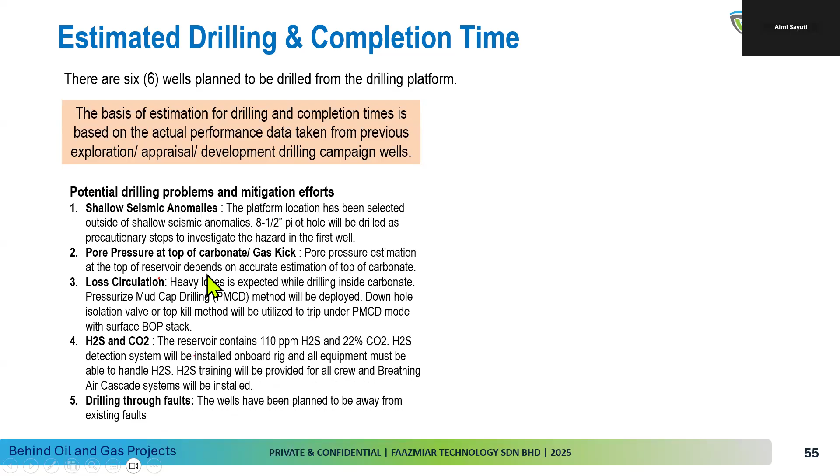So how to estimate the drilling and completion time? Because you can see a 6-well plan, for example, then talking about what the issues are based on the experience of drilling the exploration well and the appraisal well. We know what the issues are: sometimes we have shallow gas, we have pore pressure issues, we have H2S and CO2. And of course, when we list them down, based on the experience that we have with offset well data and the current well data within the field, we have all these numbers.

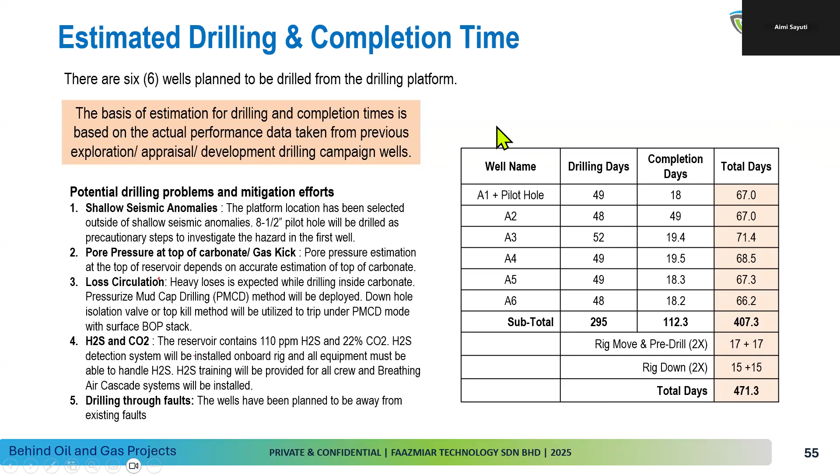Drilling is 49, for example, completion is about this. This is a different example of a deep well, HPHT. So you have about 400 days. So it's going to be more than 1 year to drill. Sometimes you want to make it fast, with 2 rigs, but because it's only 6 wells, it's one rig for one platform. So this is a gas field, sorry. It's about 400 days, about 1 year. Plus the rig move and rig down, it's 471 days. Okay, this is the timing for the wells.

We call it all the optimization that we have done. So we try to see how we could manage the third party contractors better, so that they perform well, less problem. And we do geomechanic study before we drill, so that we understand if we drill additional wells, there'll be additional issues of hole stability.

And then after the optimization study is done, batch drilling and batch completion are going to help us reduce the well days. Logistic control, saving logistics, sharing the supply base, sharing the storage capacity and so on. Offline activities is where we try to do two or three jobs at one time. So normally the rig has to be prepared to do offline, so that we can reduce the drilling days for each well.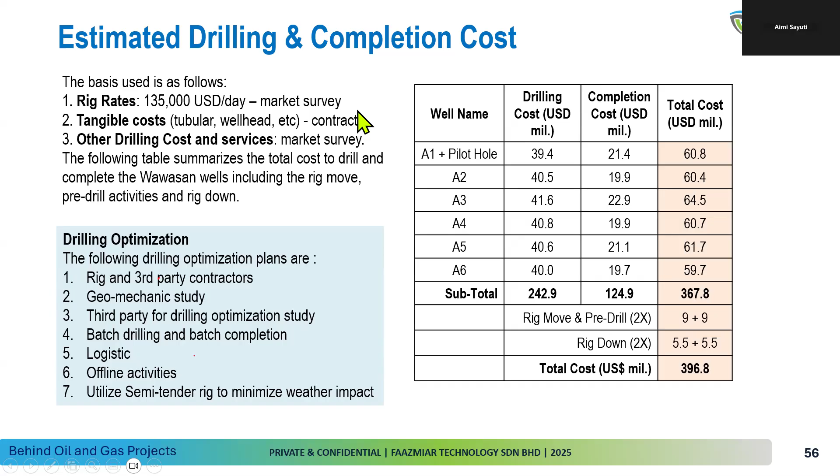Okay. So this is the area where we talk about abandonment and decommissioning philosophy. Because once we come to the end of the field life, the production is too low to balance our operating costs. So this is the time to decide to end our project life, and we have to abandon all the wells, and decommissioning means cutting off all the platform structures, cutting off all the pipelines, making it a clean seabed again, and then we declare to the host government, like Petronas, that we have done a proper well abandonment as well as decommissioning.

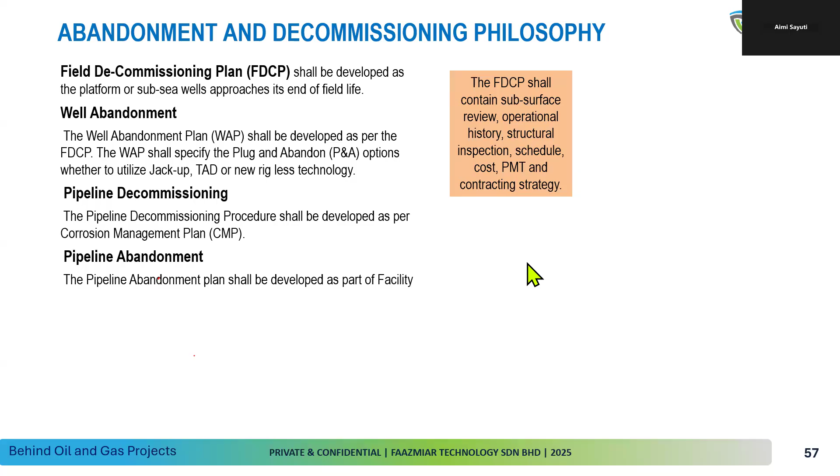So you'll be surprised. Abandonment is going to be quite reasonable, but in terms of the removal plan for the decom, this is abandonment expenditure. Removing the platform including decommissioning can be almost like 200 to 300 million. It's going to be very expensive for decommissioning. Abandonment will be about 65 million. This is abandonment cost only. But for ABEX, you can see that the number is huge.

So if the project is about 2 billion, you're talking about 10% or close to 20% on the decommissioning cost. So normally your profit will be drained out once you need to spend more money. So that's why the economics is important, to understand whether you're still profitable at the end of field life, because you are committed to spend about 300 million just to abandon the field.

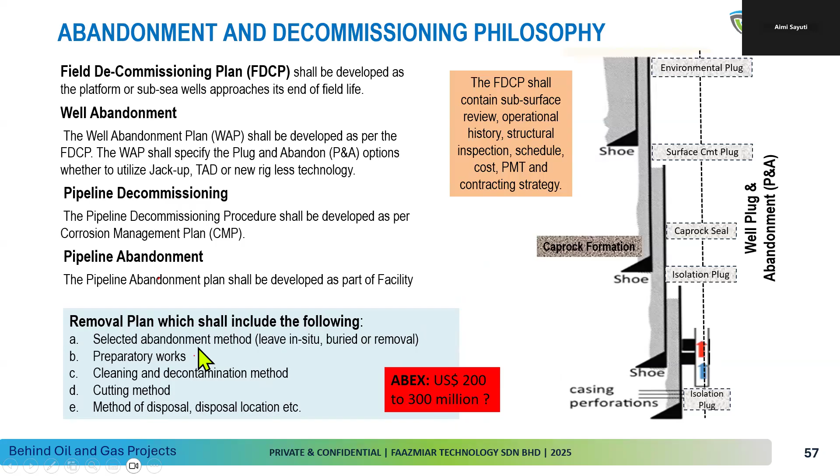But in some PSCs, most of the ABEX is covered by the host government, because they get a lot of profit from our project, and they should be able to accommodate this. But sometimes they want to make sure they are not having such impact. So they ask the operator to pay slowly through the barrel. For example, each barrel you must contribute $5 or $2. So hopefully by that contribution, Petronas will accumulate enough funds to do the project end. So there are a few styles of how to manage the ABEX, the abandonment expenditure or decommissioning of the field. So abandonment costs about 65 million for 6 wells, because it's only 6 wells, easy.

And then of course front end is building up the facilities. Facilities will cover building up the central platform, all the wellhead platforms, the pipeline. The FPSO normally is rented from a third party, so it's not much an issue. So facilities engineering is normally done by a special group: mechanical, civil, electrical engineers, all the machineries, rotating machineries and so on.

So for the layout plan, they try to make sure that they have a plan where they can optimize the production. They allow some room for expansion, some space. Because if too much space is allowed, of course it's going to be very expensive. So the bigger the platform, the more capex, the more money you have to spend. So they have to think about the best design for the field. Most facility design companies, FEED companies, are very smart. They have special software and expertise to come up with a good plan for your project.

Okay, it covers some instrumentation. Environment is very important. So even when we design, they always make sure that they have the capability to manage zero discharge, so that no oil or any contaminants from the processing will go to the sea. They will be collected properly and disposed properly. And the hazard studies are about understanding the area, such as the marine transportation, the cargo or shipping lanes, so they have to be careful about that.

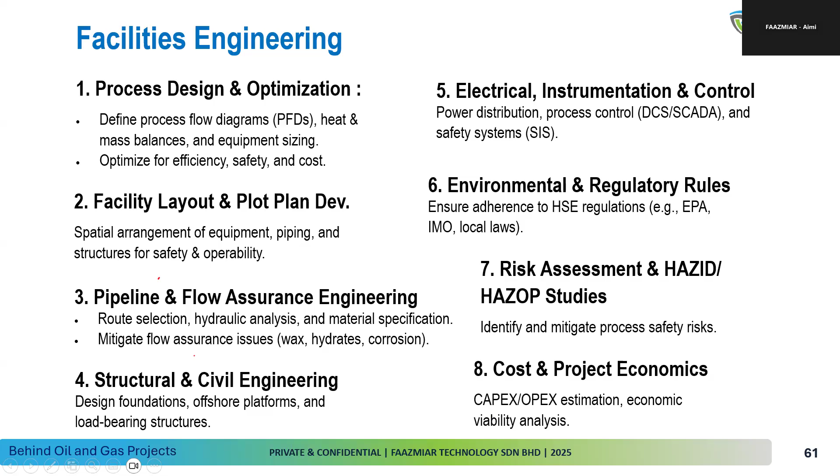Okay, project economics will also cover all these indications, to make sure that they have enough profit, because when we talk about project economics, we're talking about the PSC agreement. The PSC agreement says that if it's gas, it's going to be like 60% to the government and 40% to you. But with oil, 70% to the government and 30% to you. So we have to really come up with an understanding of how much revenue or project profit might be expected from the field.

Okay, so project management is quite important. And once we go to the project, it's going to be a very detailed understanding of the management itself. They go into detail about the scope of management, defined. So this is a very professional job, and you have the opportunity to really join this front end engineering. You will learn very detailed management of technical engineering, safety, and everything.

Schedule is going to be very tough. They're going to develop a system, monitor the schedule, and push, making sure that you always meet the requirement, no delay. And they always have a contingency plan to make sure that your project is on schedule.

Cost management is normal. You have to understand the cost estimate, the budget, the control of expenditure, and try to identify all the additional work or additional issues that ask for more money. And then are you able to supply enough money, because your economics run is based on certain numbers, certain allowance. So you should be able to work within the allowance.

Quality management is important. Risk management becomes important, because risk management will help you avoid disaster in your planning, execution, and operation of the field. So you always have to identify the risk. Because oil and gas is a matured industry, we have quite a good list of risks to identify in each particular area: platform, production lines, pipelines, processing facilities, even corrosion issues, it's all under risk management. And we are going to assess, mitigate, and monitor the risk and provide the solution for each one.

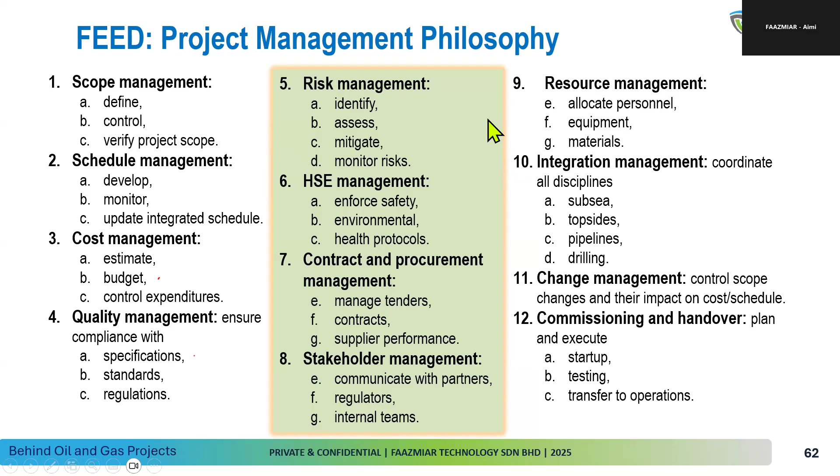Commissioning and handover: like I mentioned, before we start, we have to commission the platform. It must be done properly, identify issues, and do all the repairs before you start production and avoid disaster. Okay, so the project schedule, as you know, is going to be properly monitored.

This is a typical job, like this development concept here. Then you're talking about all the pipelines, the crane requirement for the field. Now the central processing platform, how you're going to do that, and then the design when we start, and of course the wellhead platform when we start, and so on.

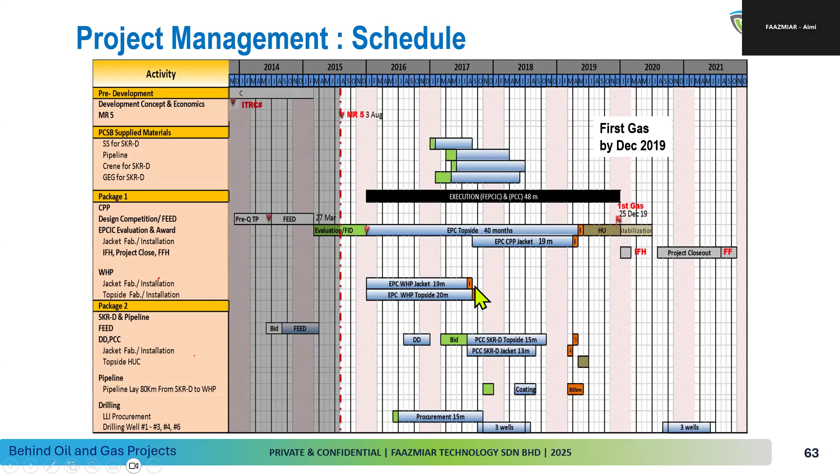Then economics is my last subject, economics. So you have unit finding cost, on the exploration side. Normally, some of the PSC mention that UFC is on your own, it's not going to be part of the calculation of unit technical cost.

But in most cases, because it is very profitable business, the host government will always allow you to claim your exploration cost once you are successful. If you are not successful, then you bear your own cost. So oil companies have to burn their budget to pay for this unit finding cost. If you are successful, normally the PSC will allow you to put in your unit finding cost plus your unit development cost plus your unit production cost.

So all these unit costs actually will be more or less divided by the total production. You have a number, and then of course unit production cost. Also, you have a total OPEX throughout the field life divided by the total production, and it becomes your UPC. Everything is divided by the total production over the field life. So if it is 25 years, it's going to be total production over that period.

So for the overview, we can see that we talk about unit cost. The unit cost, if it is finding cost, you add finding cost. Otherwise, it's just unit development cost plus unit production cost. And you have the UTC.

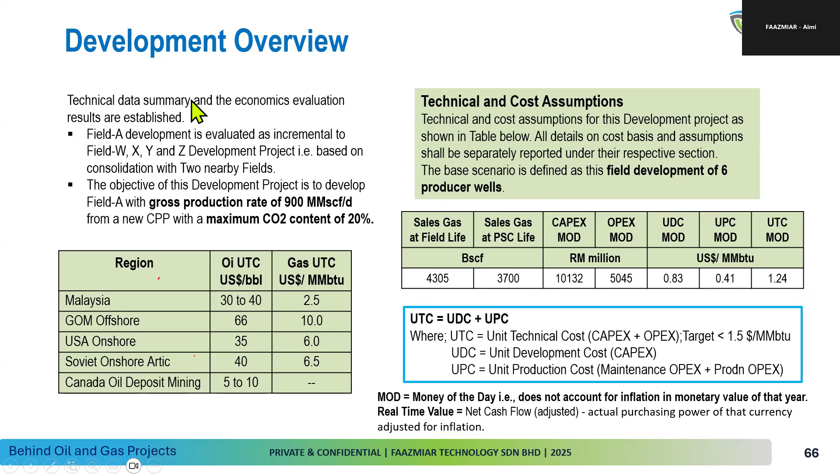Of course, to come up with the economics, you need to have the production profile. In this field, you're talking about 900 million cubic feet per day for about 11 years of production. Then, of course, production goes down due to depletion. By maybe 35 years, we should be producing close to about 150 million.

In terms of cumulative, there's another graph over here, the cumulative flow rate that we have for the field. But of course, when you produce, you're going to produce water. When you go for the high flow rate, at the same time you have water in your gas flow.

This is the amount of flow rate that you have, the liquid flow rate coming in for your production, and this is adding up to your processing. If you had 900 plus, let's say 100 equivalent, it's about almost 1 billion cubic foot of capacity required for your processing facilities.

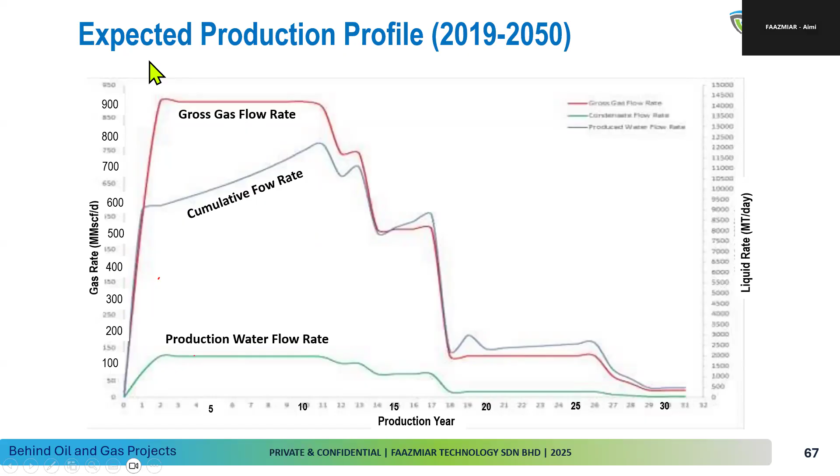Once you have that, you have to review the PSC terms and assumptions. For example, equity participation: we have 90% PCSB, then another company, EPMV, with 10%. The contract is 27 years for PSC, and exploration is given within 3 years. You must develop the field once you discover; you must start developing after 4 years from the exploration date.

Production is given a 20 year agreement, royalty 10%, research, and then supplementary 70%. Abandonment, UOP - I have to find out what is UOP. Unit of production. So this is one that I talked to you about.

They deduct the oil cost. For example, if oil is $60 per barrel, they will take out about $2 from that before we share the profit. So the split is given by this - I think this is the risk itself, RC, risk and cost. It depends on the range.

The ceiling cost for your CapEx, it's going to be this amount. It's going to be a share, like 20%, 80%, 70% share - this profit sharing between the operator and the host government, which is Petronas or the government of Malaysia.

As per the economics, you have to calculate based on the Brent price for oil. If gas pricing is based on the budget that they have, they put a study - they have a consultant that evaluates the gas price for the next 10 years, 15 years. They use that number based on the consultant study for the gas price.

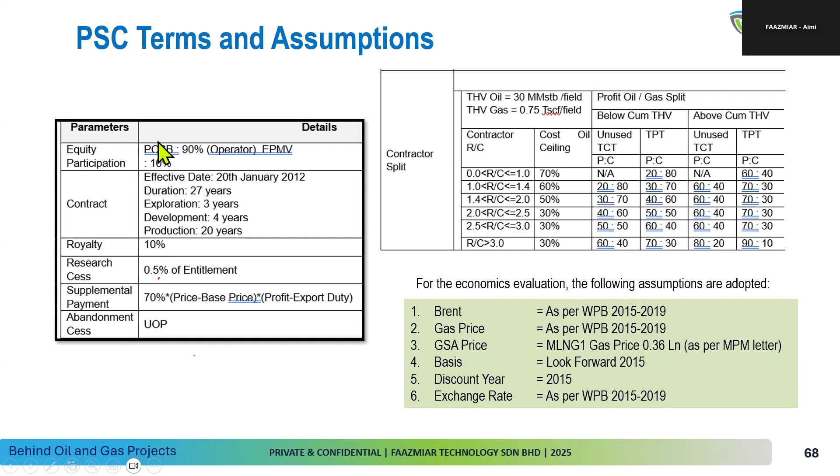And of course the GSA price is 0.36 - I'm not sure about this number. This is based on the latest 0.36 of the sale price that they have. So all these numbers here will be used to calculate the economics.

So in economics, before we agree to really implement, normally we run again all the sensitivity analysis - what if situations. For example, for this production, what if the production drops, is negative? If it's dropped by a certain percentage, then your NPV will be reducing up to, let's see here, 400, based on the P90 production.

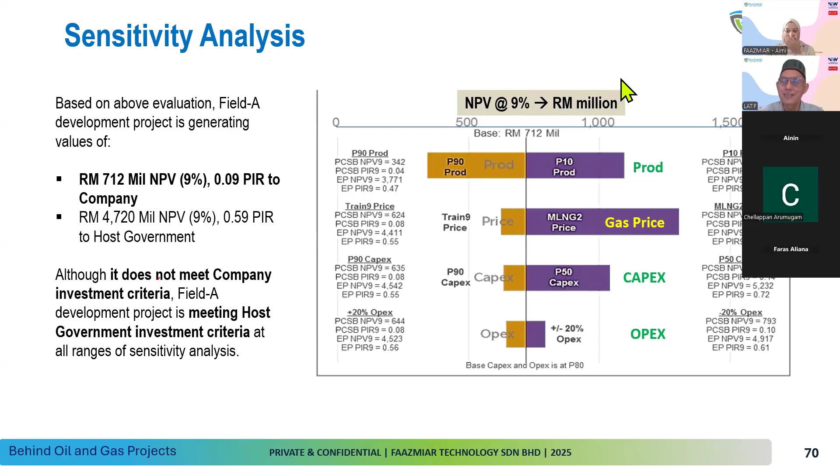I'll do the closing remarks first. On behalf of Faazmiar Technology, thank you everyone, and thank you Pak Latif for your invaluable knowledge and experience on field development planning and project execution. Today we learned how multidisciplinary teams work together through the FDP process, from geophysical and geological studies, reservoir engineering, production engineering, development options, and all the way to project economics and execution planning. We hope you found today's session insightful and beneficial.